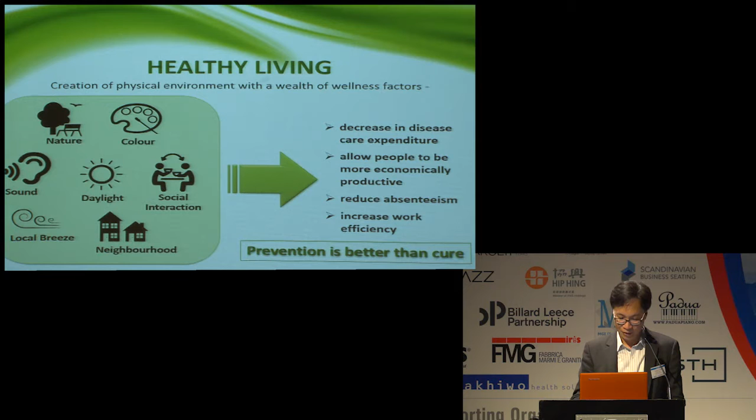We believe prevention is better than cure. Successful creation of a healthy living environment leads to decrease in disease expenditure, allows people to be more economically productive, reduces absenteeism, and increases work efficiency.

Housing Authority develops and implements one of the largest public housing programs in the world. Today, about 30% of Hong Kong's 7 million population is living in public rental estates, and we now have a total of 780,000 public rental flats. In the coming 10 years, we will be building a total of 290,000 flats.

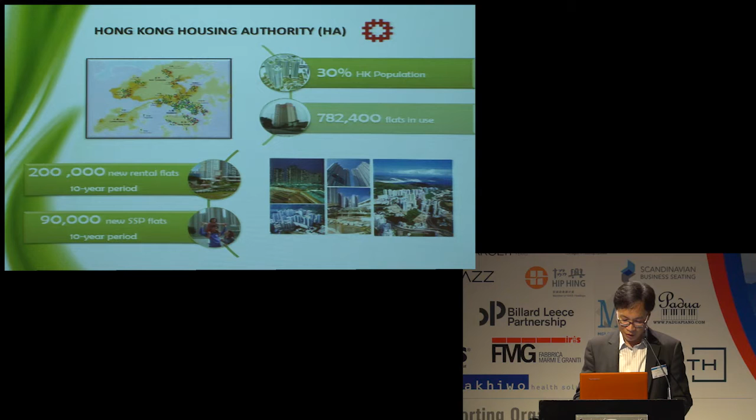So with such a sizable program to implement, while ensuring safe and healthy living in such a high-density city, as well as for people of all ages and abilities, it's quite a challenging task to accomplish. Our vision is to help all families in need gain access to adequate and affordable housing. Our mission is shown on the slide, I don't want to repeat it.

Again, let me skip these slogans. More importantly, what have we done to claim that we care for people? We plan for people.

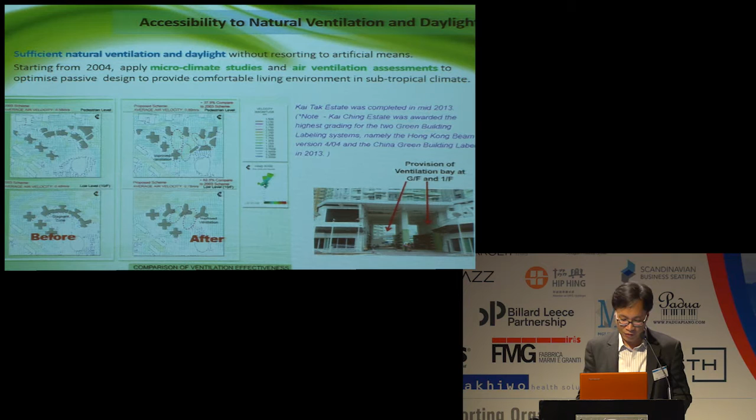First, on light and air. Accessibility to sufficient natural ventilation and daylight without resorting to artificial means is of paramount importance in composing a healthy living environment for our tenants. Starting from 2004, we have been applying microclimate studies and air ventilation assessment in all our public housing projects during early planning and design stage to optimize passive design to provide a comfortable living environment in our subtropical climate.

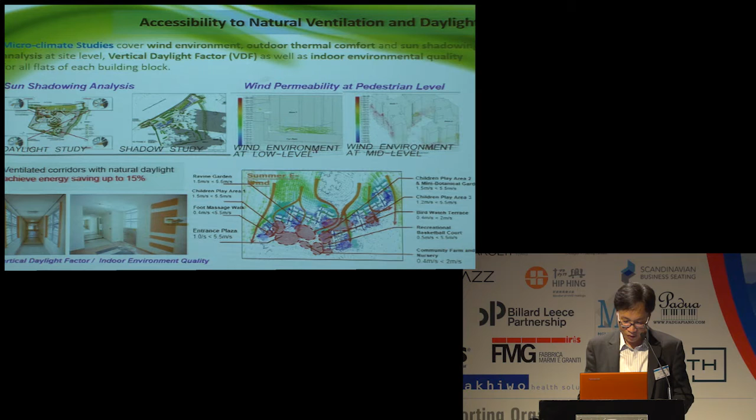Microclimate studies cover wind environment, outdoor thermal comfort, sun shadowing analysis, vertical daylight factors, and indoor environmental quality for flats. With help of computerized simulation models, the local climate can be optimized. For larger surrounding areas, we also conduct air ventilation assessment at early planning stage to verify no air, noise, and water pollution and other hazards to the development.

Tony talked a lot about greening. We humans have a positive reaction to nature and natural environment. Exposure to natural environment helps reduce stress, improve mood, and improve cognitive performance. Greening also purifies air, avoids urban heat island effect, aside from ecological and amenity value.

We commit to maximize greening in new estates. We strive to provide an overall greening area of at least 20% of the total site area, and for larger sites, 30%. We plant at least one tree for every 15 flats. Indigenous plants will be selected to maintain ecological balance.

For congested sites, again, roof greening and vertical green panels are introduced. In addition, community farms will be provided in all our new estates where tenants could participate in person in small-scale planting.

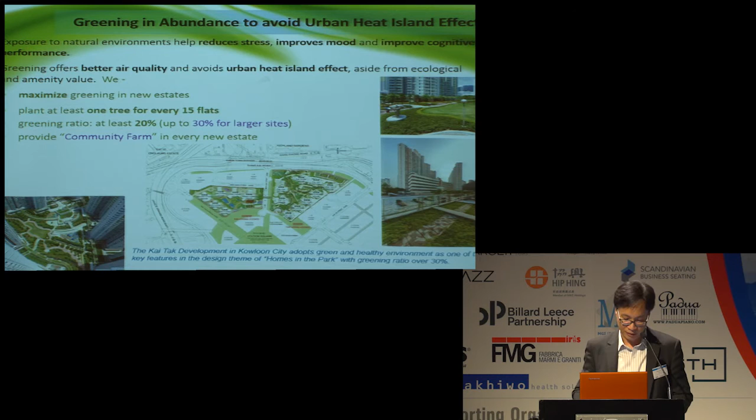Healthy living also means a home immune from noise nuisance. For housing sites exposed to severe traffic noise, we apply a series of noise mitigation measures.

These include mitigation at source, for example, installing noise enclosure at the noise source; mitigation along the path of propagation, for example, installing noise barrier along estate boundary; and mitigation at the receiving end, for example, building setback, refining flat configuration and disposition, applying vertical fins.

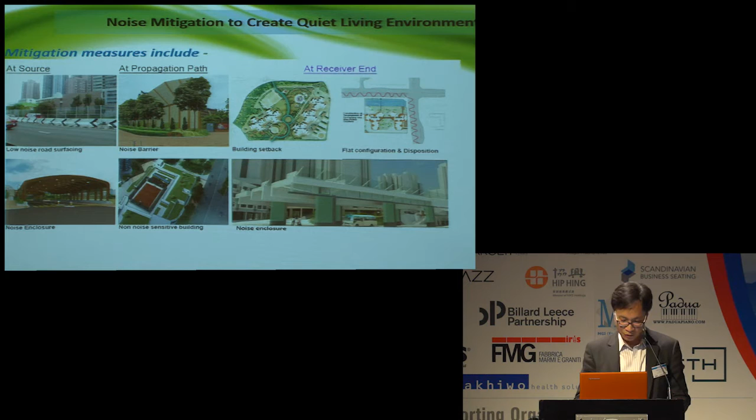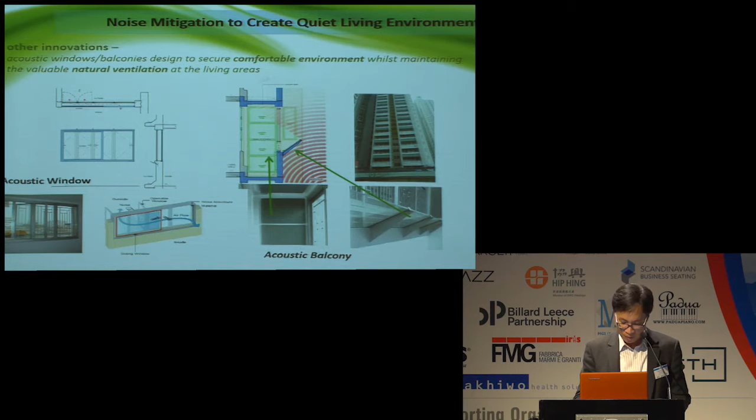We also adopt other innovations to alleviate traffic noise problems, such as acoustic windows and acoustic balconies. This innovative design could secure a comfortable environment while maintaining desirable natural ventilation to the living area.

Now on water. Clean, safe drinking water is scarce from a global perspective. Provision of steady, sustainable, and hygienic water supply system to our estates is conducive towards healthy living.

To prevent Legionnaires' diseases, all new piping systems and associated freshwater storage tanks for cold water systems will be flushed clean and disinfected upon commissioning before use by our tenants.

In 2008, we pioneered the twin tank system, with the water tank divided into two compartments to ensure continuous and uninterrupted water supply to tenants, even when one of the compartments is being cleaned during regular tank cleansing every quarter.

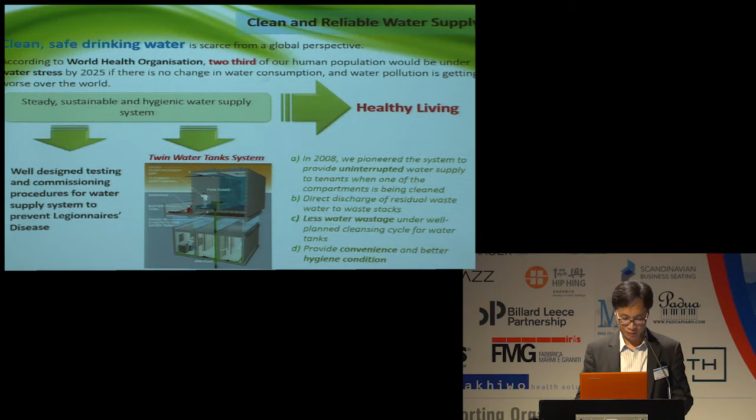Healthy living demands a reliable and watertight waste drainage system to safeguard our densely populated high-rise domestic towers. The SARS crisis in Hong Kong back in 2003 aroused public concern that possible transmission of virus or epidemic disease between different domestic flats was caused by the drying up of water seals in wastewater drainage systems.

Housing Authority has taken up R&D works and came up with an innovative design called the Common W-Trap System. It collects wastewater from both the basin and the shower, which are in frequent use, thus keep replenishing the traps round the clock, avoiding their drying up.

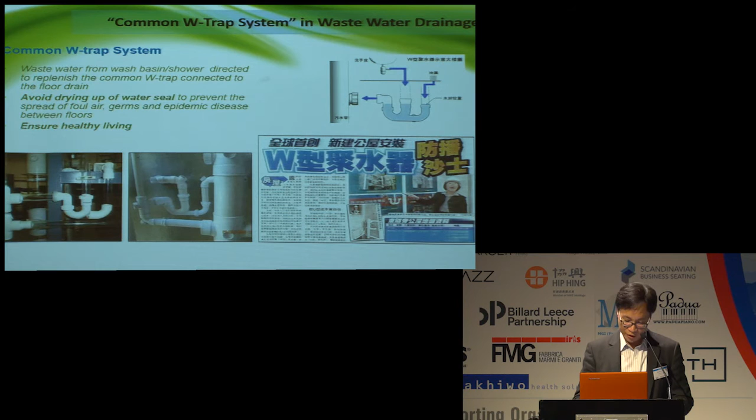Availability of a reliable, hygienic refuse handling and collection system round the clock in a high-density, multi-occupancy block is also critical. We provide ventilation and filter systems for refuse rooms on every floor to ensure sufficient air change and odor removal, with space allowed for waste separation and material recovery.

For developments that generate a daily refuse output of 5 tons, equivalent to about 2,500 flats, a refuse handling system with central compactor is generally adopted. The refuse is compacted, stored inside an airtight container, and collected by the Food and Environmental Hygiene Department before leaving the estate. Deodorizers using biochemical technology have also been installed in covered refuse collection points since 2003.

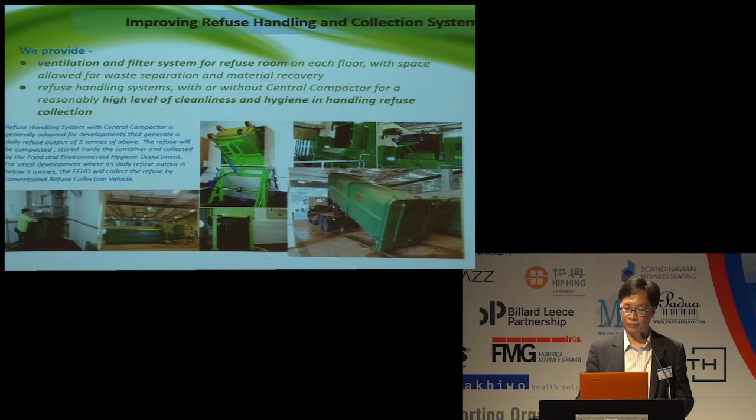Encouraging social interaction aside, provision of a series of proven security measures that bring forward a safe home for our tenants, for privacy and security and against unwanted intruders, is of equal importance. At flat level, metal gates are provided at flat entrance and entrance doors, further secured with security door guards.

At block and estate level, we provide systematic security measures to safeguard home security and safety of our tenants. System A includes the provision of ground floor security gate with digital locks, 24-hour security guards, CCTV in lift and ground floor lobbies, and door phone system.

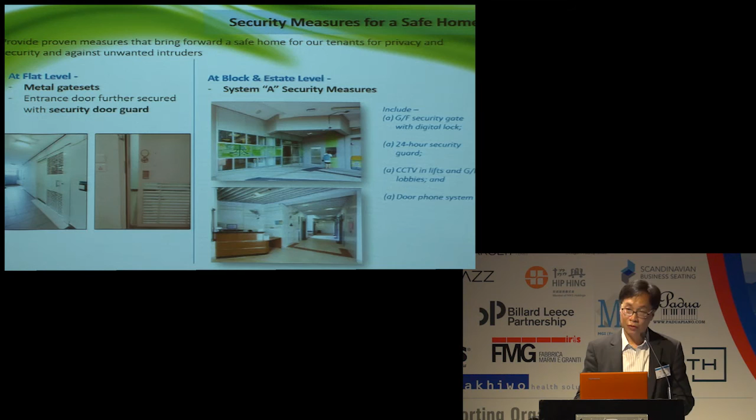Next subject is design for livability. Safe and convenient access with a sense of place plays a vital role in fostering social cohesion in a harmonious community.

In pursuit of social responsibility and sustainability, we have been implementing the concept of universal design in the design of our new public housing estates since 2002. Both domestic flats and common areas are designed with barrier-free access and provided with facilities having regard to safety and user convenience. Circulation routes are designed with sufficient width for the use of wheelchairs and walking aids.

Non-slip floor tiles are used for corridors, kitchens, and bathrooms. Full height vision panels are a standard feature on kitchen doors to allow viewing and avoid accidents. Other provisions include lever-type door handles, lever-type mixer taps, shower heads on vertical rods, sunken showers to eliminate the curb, sockets, large electrical switches, and doorbells at optimal locations to ensure easy reach.

Tactile guide paths connect the main estate entrance to the domestic blocks and major estate facilities, to assist visually impaired persons to travel independently within the public housing estate.

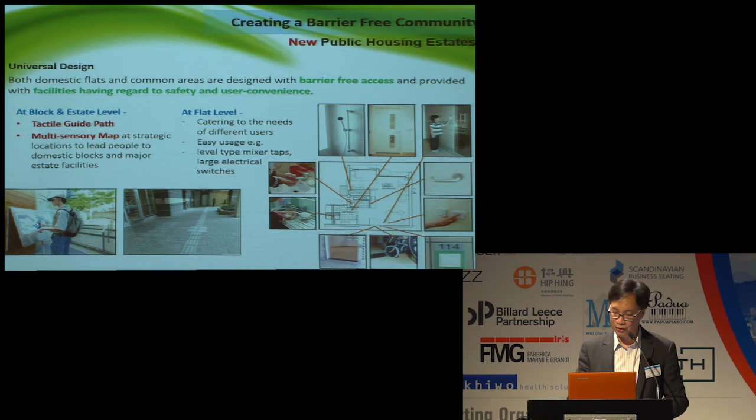A typical corridor and lobby within domestic blocks adopts an energy-saving two-level lighting system to maintain a minimum lighting level of 30 lux for typical corridors and staircases, and 15 lux for typical lobbies, for safety and security consideration during normal use.

If required by those in need, additional lights can be switched on manually to increase the illumination level up to 85 lux temporarily.

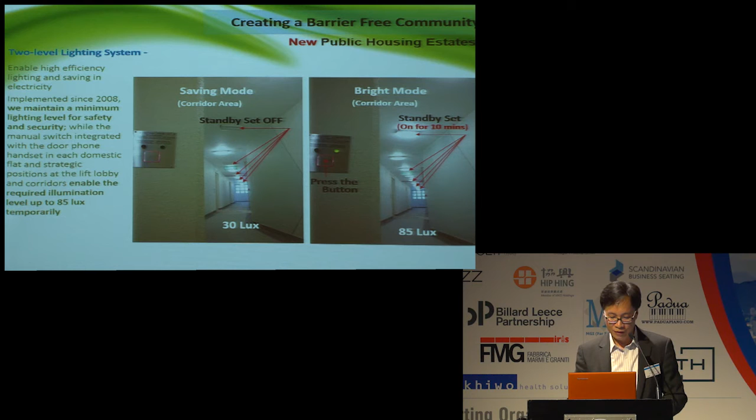We care equally about our existing public housing estates of older design. Following the introduction of barrier-free access in 2008, the Housing Authority launched in late 2010 a major retrofitting program to improve barrier-free access of existing properties to the prevailing standards as far as practicable and proactively.

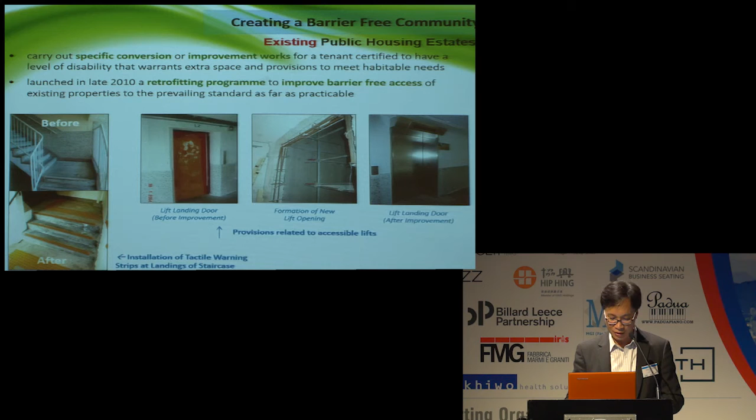Ramps, drop curbs, tactile guide paths, and appropriate signs for easy identification of barrier-free access routes have been installed. We also upgrade lift cars with voice synthesizers, tactile and braille call buttons.

We consult and engage the local community and listen to local voices as we prepare the planning brief. We adopt a comprehensive approach in the planning and design of our housing estates to ensure that they are equipped with all essential ancillary facilities.

Next, we make these ancillary facilities accessible for all people of different ages and abilities. For example, circulation routes are barrier-free, with covered walkways linking estate entrance and transport drop-off to individual housing blocks for weather protection, lift towers to overcome hilly terrain, and foot bridges to offer safe and convenient grade-separated pedestrian routes.

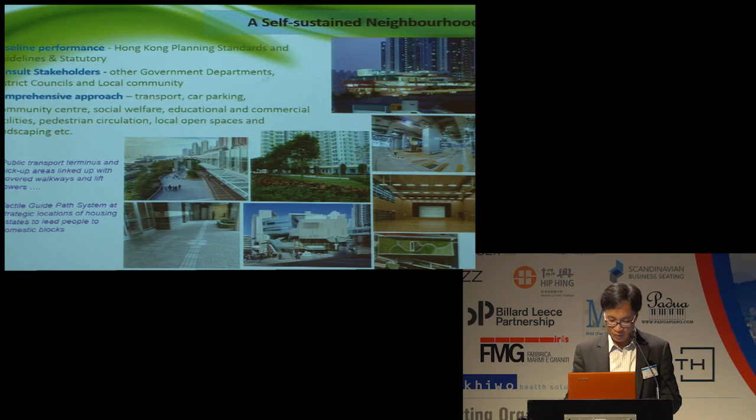We are committed to fostering self-sufficiency in the local community, peace of mind, and a strong sense of belonging for our tenants.

Hong Kong is a compact city, characterized by its high-rise, high-density development. Living space is tight, given the allocation standard for public rental housing.

After venturing a few years into the area of site-specific design of our blocks, we have lately developed the modular flat design approach.

Modular flats are like Lego. Individual designers could articulate these basic flats in designing their site-specific blocks to suit individual site configuration.

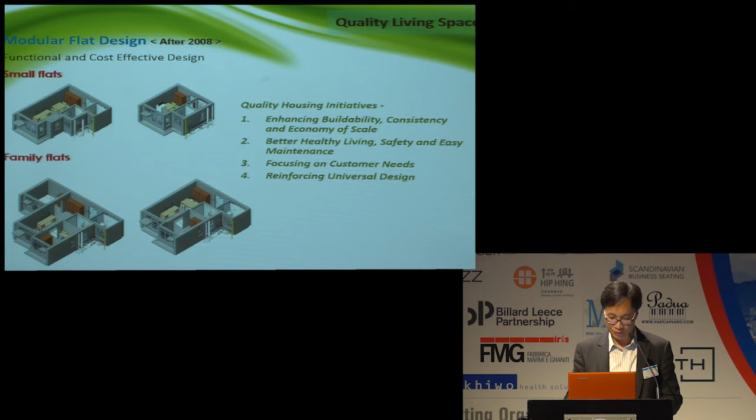Inside the flats, with universal design concept thoroughly applied, all domestic flats are self-contained with basic facilities, including flat entrance gate set, window grills for home security, sink and cooking bench, watertight windows, wash basin, sunken shower, and laundry racks to suit tenants' needs.

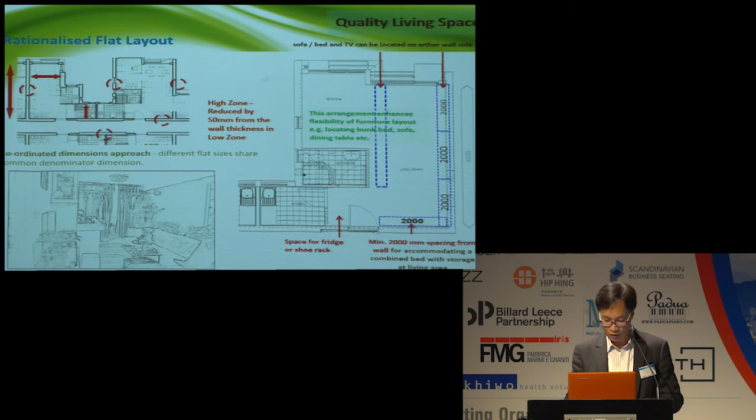With coordinated spatial dimension and shear wall without partitioning, modular flats allow greater flexibility in furniture layout and room partitioning by residents for better livability.

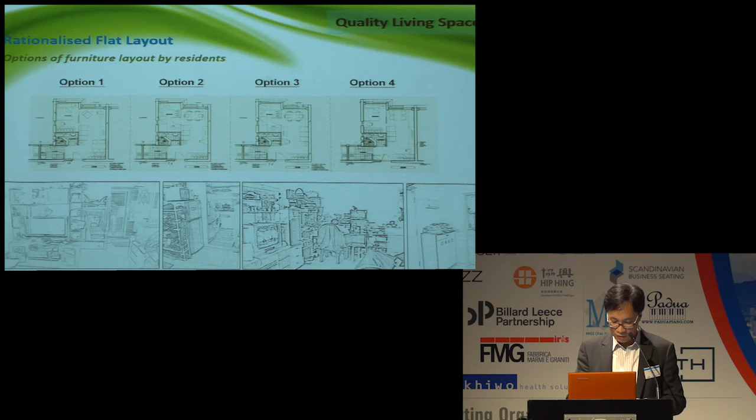This slide shows the number of viable furniture layouts done by residents themselves, even for a small unit.

Window provision is maximized in modular flat design for better natural lighting and cross ventilation. The positioning of main windows all along the main frontal facade provides optimum view to the outside while avoiding overlooking between adjoining flats.

Cultivation of a low-carbon living environment also helps nurture healthy living habits of our tenants. Let me quote some environmental friendly and low-carbon initiatives provided in our public housing estates.

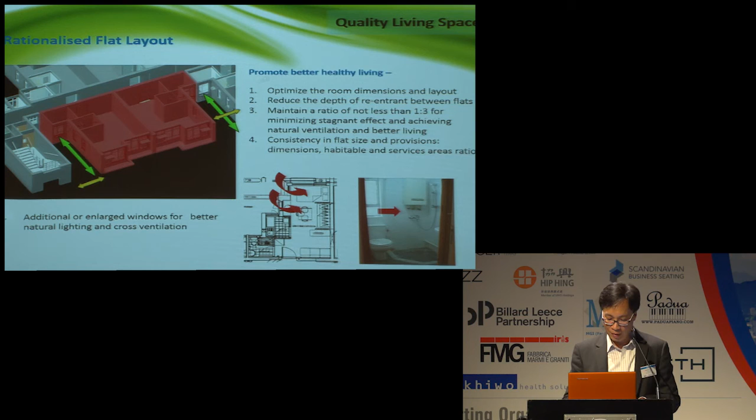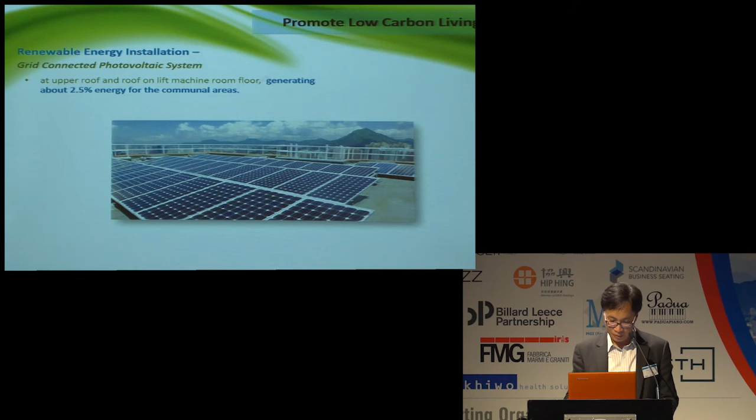I'm not going to go into details as we're running out of time. Again, PV panels on roof. Use of gearless drive for lift installation for energy saving. State-of-the-art technology enabling capturing of regenerative power from lift systems.

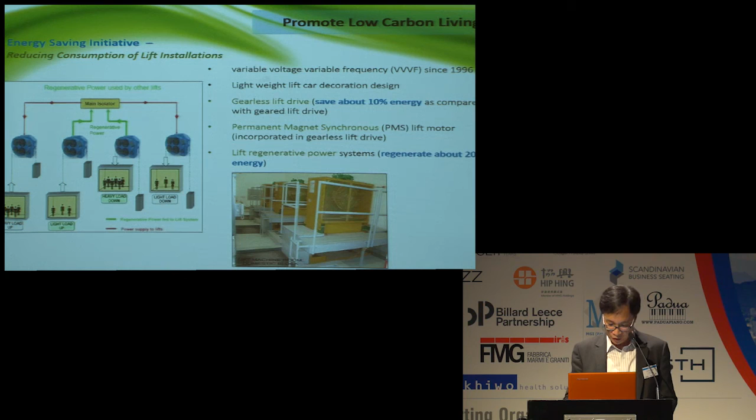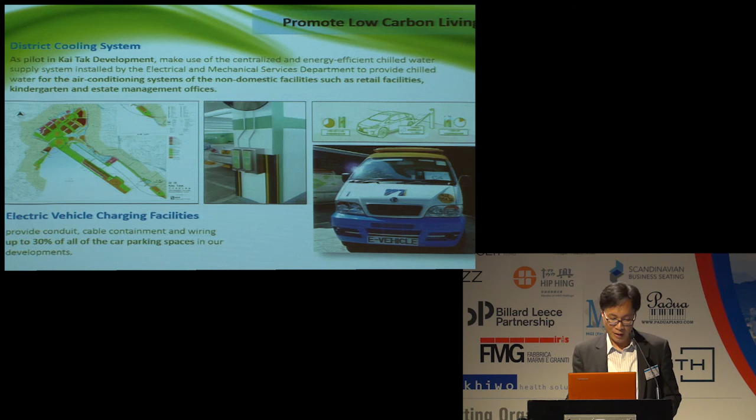Use of a district cooling system for one of our projects. Providing electric vehicle charging facilities. Harvesting rainwater. Exploring root zone irrigation systems and zero irrigation planting systems for water saving.

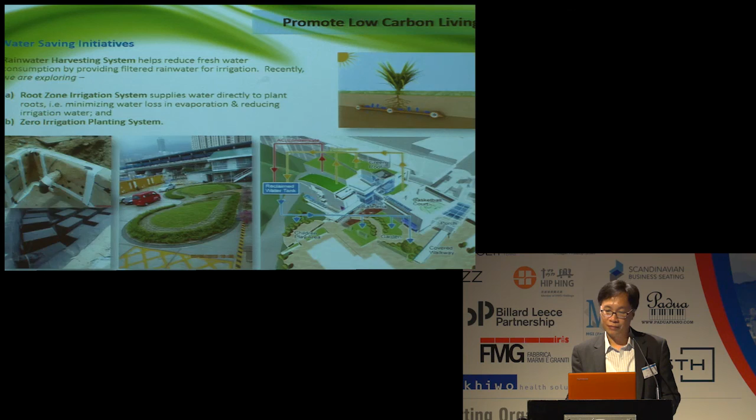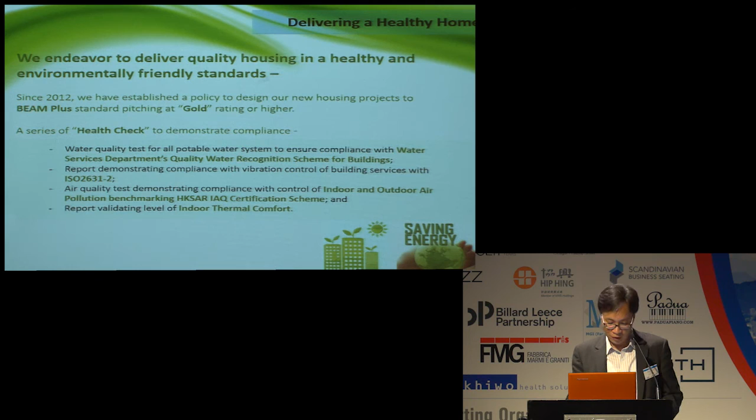Just two more slides. From a piece of bare land, we plan, design, and build homes with passion for humble citizens, caring for people and caring for the environment from macro to micro level.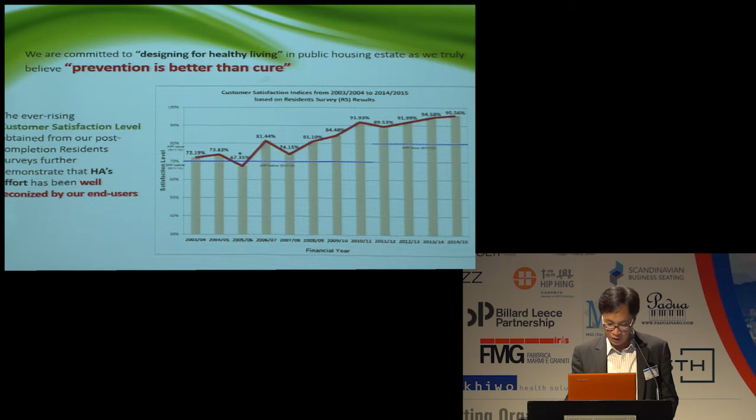We are committed to designing for healthy living in public housing estates, as we truly believe prevention is better than cure. The ever-rising customer satisfaction level, as high as 95.56% obtained from our post-completion resident survey, further demonstrates that Housing Authority's efforts have been well recognized by our end users.

Home is where the heart is. We want to put well-being at the heart of our buildings.

We will continue to excel the effectiveness of our planning, design, and construction process by way of undertaking R&D activities as part of our design and project management routine, regular liaison with our business partners, and engaging tenants to encourage innovation and creative ideas.

Rigorously sharing experience with industry stakeholders, both local and overseas, and taking on board advanced construction practices where deemed smart and practicable. This ends my presentation. Thank you.